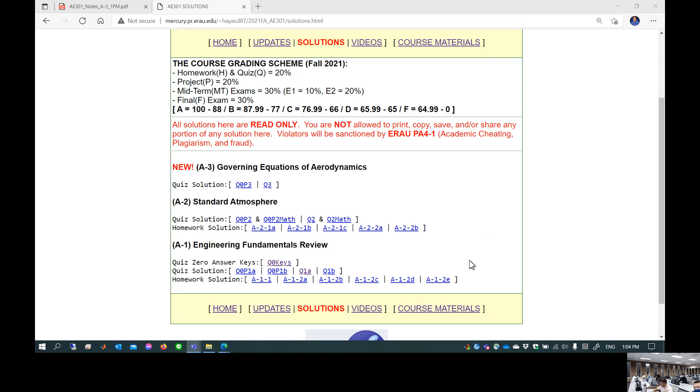Okay, so no new updates. We keep talking about the energy principle. We got stuck on Bernoulli. We need something, not Bernoulli, but something we can use - a replacement of Bernoulli, that's what we're seeking. So let's continue seeking by employing the energy principle, conservation of energy, which is essentially the thermodynamics first law.

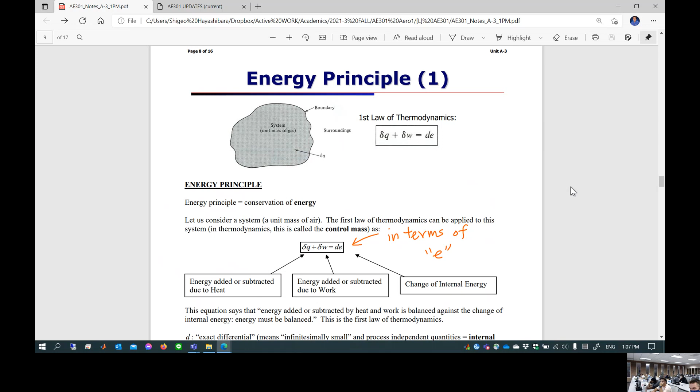So we want to include that analysis, and then hopefully we come up with an equation which can replace Bernoulli's equation in high speed. That's what we looked at. And then the starting point was, do you remember that starting point? We started from the first law of thermodynamics.

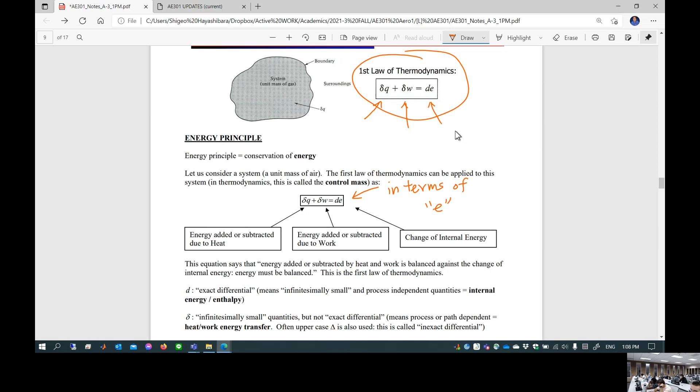Obviously, this is the first law of thermodynamics. I keep forgetting to connect this up, sorry about that. So we started from first law of thermodynamics. This basically simply says that heat transfer plus work transfer, added together, is balanced against internal energy changes. That's a very simple deal, and then we did something. We introduced moving boundary work, plugged it back into the first law of thermodynamics, and came up with first law of thermodynamics in terms of internal energy to begin with. This is equation 1.

So this equation, if you try to look at it, the key term is delta Q. Delta Q is heat energy transfer per unit mass, equal to change of internal energy plus something called PdV, pressure times the differential change of specific volume. This is a change of specific volume because of the pressure, it just keeps shrinking and expanding. So those two things added together is going to be the external application, like a heat exchange due to temperature change. This is the heat energy transfer involved.

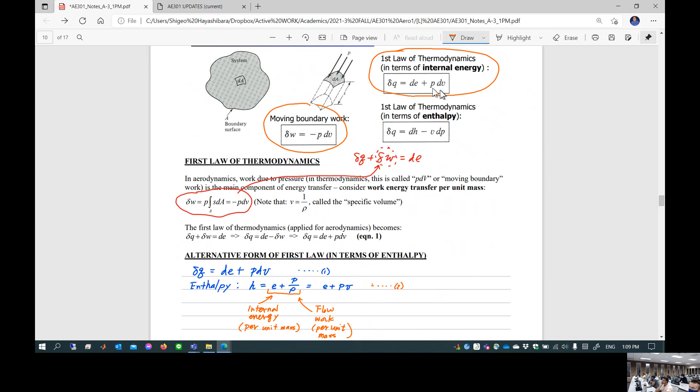Now, starting from here, we introduced a new variable, something called enthalpy. Enthalpy is a combined property, two things combined: internal energy and then P over rho. What's that? People say P over rho, pressure to density ratio, and then people call that flow work or flow energy. What the heck is that? It's very difficult to comprehend.

It's sort of like compressibility, yes, because pressure multiplied by the specific volume is called flow energy or flow work per unit mass. But it's not necessarily equal to 100% compressibility. But if you want to incorporate compressibility into your Bernoulli's equation, you cannot ignore that component.

When you try to solve quiz 3, you use this flow energy as a trade-off against kinetic energy, I think I made a comment on that. You are making a trade-off between flow energy and kinetic energy. That's why at the test section, what is the static pressure at the test section of a wind tunnel? That's minus Q. What do you mean by that? That's the trade-off between kinetic energy Q and flow energy, which becomes minus Q. So you give a kinetic energy Q so that you have wind flowing in the test section.

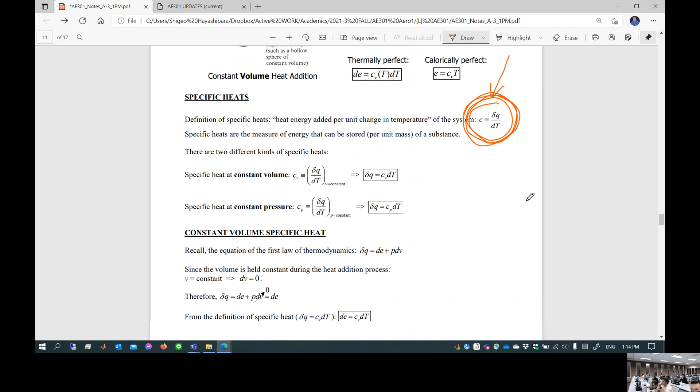So it comes with a condition to measure the specific heat. When you measure the specific heat of air, you have to employ a certain method. One method you can employ is you put your air inside of a rigid tank. Rigid tank means volume never changes. Then you stick your thermometer in it.

Then you keep monitoring the temperature until it becomes 1 degree different. You keep adding heat energy - you heat up and heat up and heat up. The amount of energy required to increase the temperature by 1 degree under the condition of a rigid tank, constant volume, is called Cv.

Specific heat under the constant volume condition. Lowercase v, because constant volume means specific volume is constant too. Specific volume is how much volume you have for 1 kilogram of air, right? So this is called Cv, constant volume specific heat. So this is one definition of specific heat.

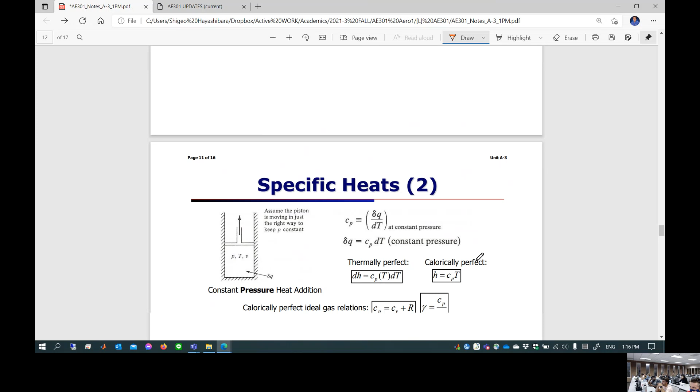You understand that? There's also another way to measure the specific heat. Let's skip to the next page. So this is another way to measure it. You can put your air into - here we go - this is a classic example of thermodynamics, the piston cylinder configuration: weightless, frictionless, no leak.

You put the air in it, but it's free to expand, obviously. So you keep adding heat energy, heat up until you see a 1 degree change of temperature, and just let it expand. If you let it expand, that means the pressure stays constant. Volume changes, but the pressure stays constant. This is called constant pressure specific heat, CP.

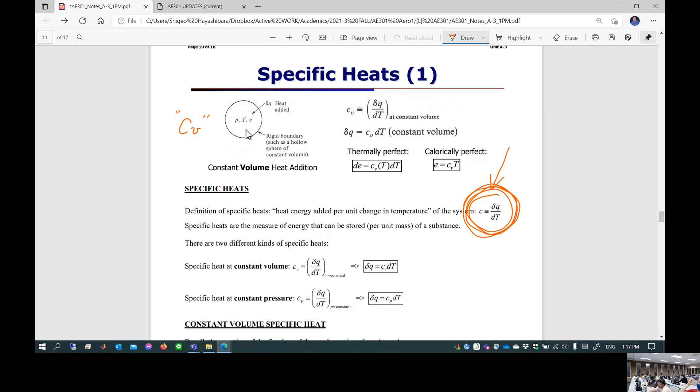So there are two definitions for specific heat, fundamentally different, because these are different ways to measure it. Do you understand those? Very, very important - this is called CP. Often, for air, we choose CP. There's a reason for it, of course. This is Cv, constant volume specific heat. This is CP, constant pressure specific heat.

So let's take a look at one by one. This is the specific heat at constant volume. Definition of Cv is, of course, delta Q - amount of heat transfer - divided by differential change of temperature under constant volume. So this equation tells you the relationship.

By knowing Cv - like I said, Cv is a material property. Air comes with a certain value of Cv, sure. So if you know, let's say, the Cv value of this classroom...

You can relate the temperature around here happening to be higher than the temperature around here because the person's sleeping and the professor's kind of mad. So this is kind of a hot zone and this is kind of a cold zone, right?

Do you think the energy is different? Of course, yes. So do you think heat exchange happens between those two? Sure - let's say because I keep yelling, putting my energy, the heat exchange, the temperature is higher here, and lower here because this person is so cool.

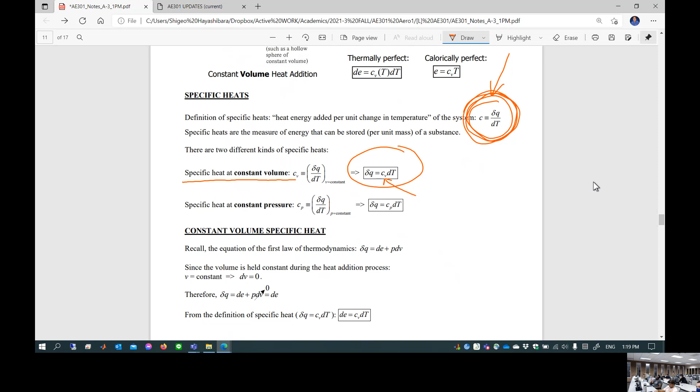Let's take a look at constant volume heat addition process. This is rigid tank. You put the air in, and then you just keep adding the heat. Delta Q is happening. Volume is constant. You just keep heating up and heating up. That's the situation - constant volume heat addition process.

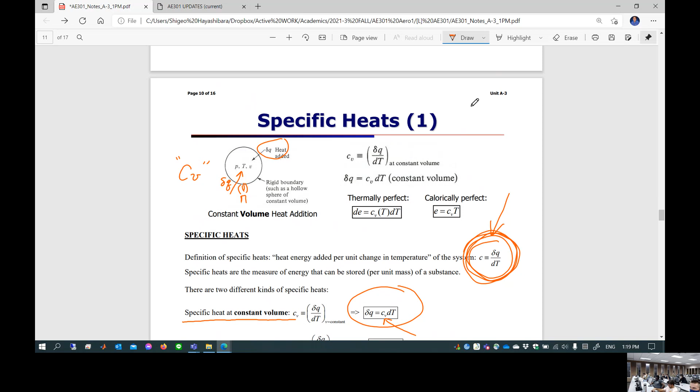Let's take a look at it. So now I'm going to pick up the equation right here - first law of thermodynamics in terms of internal energy. I'm going to pick up this equation and apply it for a constant volume heat addition process. Let's just do that.

So this is the first law of thermodynamics in terms of internal energy. This is the constant volume heat addition process. Constant volume means specific volume constant. If so, what is dV? Differential change of specific volume is, of course, 0. Oh, that means this term is 0? Yeah. This is the result for the constant volume heat addition process.

What are you talking about? This is the rigid tank. You just keep adding the heat, delta Q. And then you basically say that delta Q, the amount of heat you added, is going to be completely converted into the change of internal energy. Delta Q is equal to dE, is that correct? Simple as that, because the volume is constant. First law of thermodynamics basically says that the amount of heat you added to the constant volume heat addition process equals the change of internal energy.

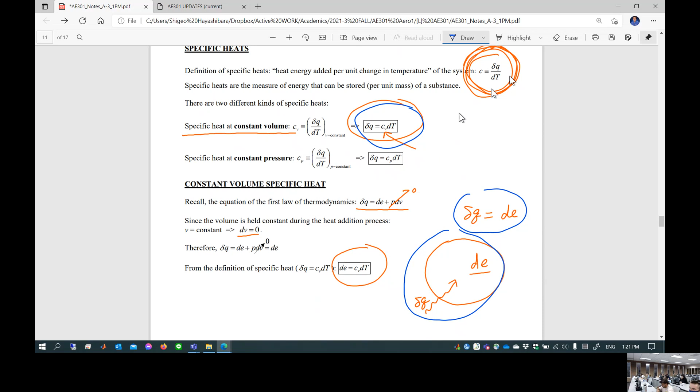Then you can combine this equation with that one. You're going to have this equation. So this is the conclusive equation here on this page: dE is equal to CV dT.

This is actually quite an important equation. This equation relates temperature change to internal energy change. If you know the specific heat under the constant volume process, since this is a material property, you can relate the temperature to the internal energy. High temperature, of course, higher internal energy. Lower temperature, of course, lower internal energy. You can say those things using this equation.

Go ahead, I just answered my own question, thank you. Okay good, did I answer? Yeah, okay good. So one more important step here. Now, this seems to be great news.

However, the problem is specific heat is not a constant. It changes. And you go like, oh my. It changes, it's not a constant. It is constant only in a range of temperature - in other words, room temperature zone. If you're talking about this classroom, yes, specific heat is 1,004.5, a constant value. However, if you're dealing with high-speed flow field where compressibility kicks in, temperature changes become severe, so specific heat will be a different value.

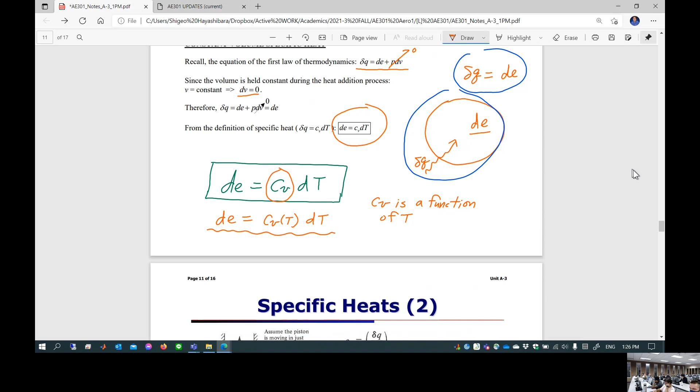Guaranteed. Next thing is Cp. We're gonna do the similar thing. This is the pressure constant heat addition process, of course. Piston cylinder, you let it expand, but let's make the pressure constant.

Okay, so we're going to do the same thing. We are going to pick up the first law of thermodynamics in terms of enthalpy. Remember, this is the equation we derived in last class. In terms of H, enthalpy is involved. By the way, what is enthalpy?

What is enthalpy? Internal energy plus flow work. E plus something, flow work. Flow work is essentially P over rho, or P multiplied by specific volume. That's right. So internal energy plus this thing combined together is enthalpy.

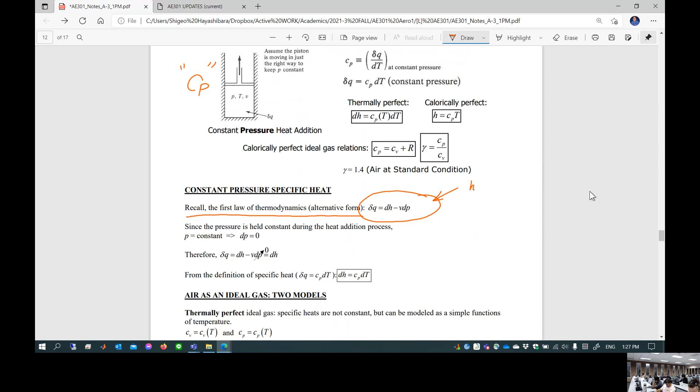Remember that? Okay, so let's go through the same process. This is constant pressure heat addition, that means P is constant. dP is 0, oh, that means this term is 0.

So the equation basically becomes: whatever heat is added to this constant pressure heat addition process is converted 100% into change of enthalpy. What is the change of enthalpy? It's two things combined. Obviously, if you add heat for this type of piston cylinder configuration, internal energy increases, temperature increases. At the same time, you create work.

Those two combined is enthalpy, right? So if you add heat for this kind of configuration, two things happen: temperature goes up, and work created goes up. Those two combined is called what? Enthalpy, that's right. Okay, that's what we are seeing.

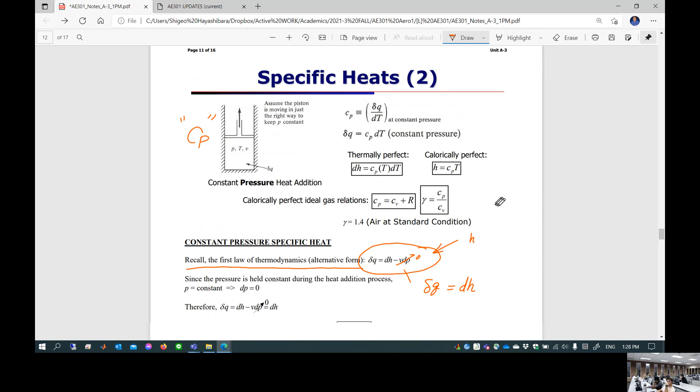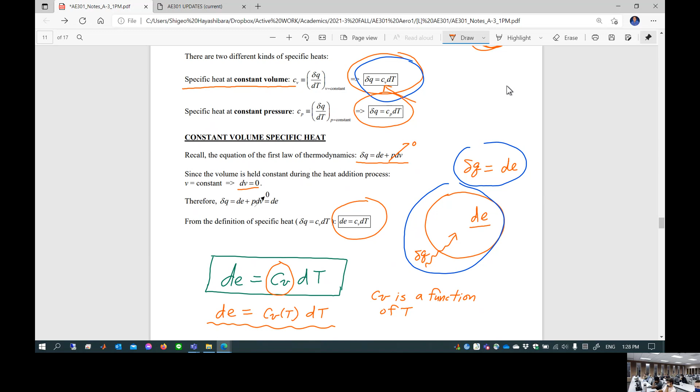Now we are going to combine this relationship together with the relationship from the previous page, and you're going to come up with a similar equation to what we have here. So let me just draw a conclusion here: similar equation, dH is equal to Cp dT. Okay, so this basically relates the temperature to enthalpy.

Question? Yeah, that symbol in front of the Q, is that supposed to mean change? For the symbol in front of Q, does that mean the change in heat or something? It's an infinitesimal change, yeah. It's a heat transfer. Heat transfer is a change, how much energy you transfer. Yeah, that's delta Q.

Okay, so once again, bad news: this Cp is not a constant. Is it a function of? It's a function of temperature. So here we go: dH is equal to Cp, as a function of temperature, dT. So you've got a similar equation, thermally perfect ideal gas.

Okay, let's just summarize here. So thermally perfect ideal gas means you can relate the temperature change to the enthalpy change if you know the value of specific heat under constant pressure. However, this is not constant, it's kind of constant under this temperature range. That's called calorically perfect ideal gas.

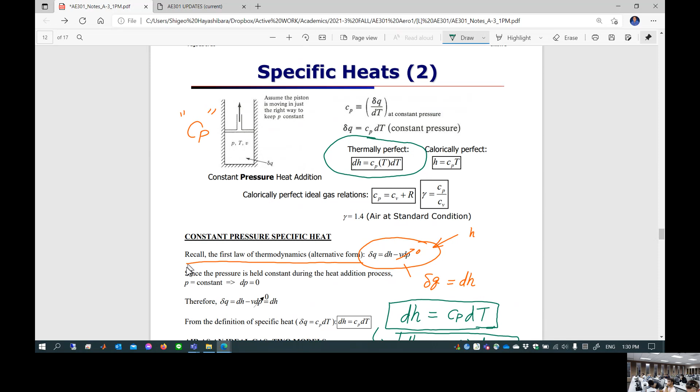Similar to the previous page: thermally perfect ideal gas means if you know the information of specific heat under constant volume, you can relate the temperature change to the internal energy change. Problem is, this is not a constant function of temperature. It's called calorically perfect ideal gas model.

So the problem is, this is kind of similar to equations you've seen in the past, a governing principle. The hydrostatic equation is an equation like this, differential form, right? Euler's equation, it's a differential form too. This is also differential form. You don't like this form because you cannot plug in a value and get a value out.

So you have to do something. What do you do? Integrate. Integrate both sides, but this is not constant, Cv's not constant. Let's assume this is constant, then you can finish up the integral: calorically perfect ideal gas. Okay, so always starting from here.

Now under this range of temperature, let's assume it's constant, just like Daniel Bernoulli assumed here: let's assume density constant, finish up the integral of Euler and get Bernoulli. That's the same thing happening here. So you're going to get calorically perfect ideal gas, assuming this is a constant value over a given range of temperature, typically called room temperature, right?

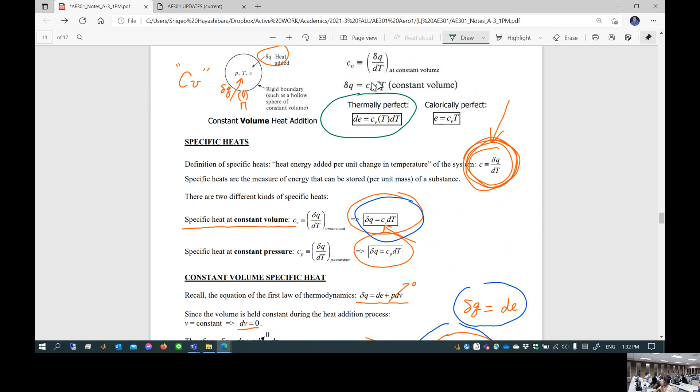No, I don't know Cv, actually Cp, because I oftentimes use only Cp. So same here. Calorically perfect ideal gas relates H and T if you know Cp, if the Cp is constant.

1004.5 joule per kilogram Kelvin, or 6006 foot-pound slug rankine. How did I get that?

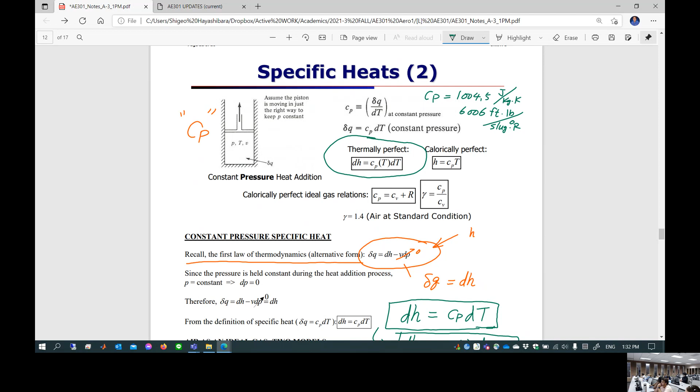Prepare to derive the equation to get the Cp value. It's your homework. It's easy. Don't worry about it. Any question here?

Go ahead. What do you mean by the range? Is it like plus minus? Yeah, let's find range out. A little bit later. Just be patient, a little bit more. You're going to find out. Don't worry about it. Okay?

And then there's a relationship between Cp and Cv. If you know one of them, you can tell the other one. This is the relationship between Cp and Cv. If you know Cv, just add the gas constant of air.

Do you know the gas constant of air? 1716 foot-pounds per slug rankine, or 287 joule per kilogram K. That's the gas constant of standard air. If you just add that to Cv, you can get Cp. We're going to derive this relationship also later. Just wait for a second.

So I see it says calorically perfect ideal gas relation, but could you use it if it wasn't a perfect relation, if it was more thermally perfect? You are going to introduce errors, of course. Obviously, the air is going to store a different amount of energy if it's a high temperature zone. So you're going to introduce error in your simulation or analysis. Yeah, that's right.

And then for the calorically perfect case, is that H equals Cp times the change in temperature? No, this is temperature itself because you integrate it. This is the temperature, let's say 25 degrees C. What is the enthalpy here? You can compute it, right? Isn't that great? Yeah, because it's calorically perfect ideal gas.

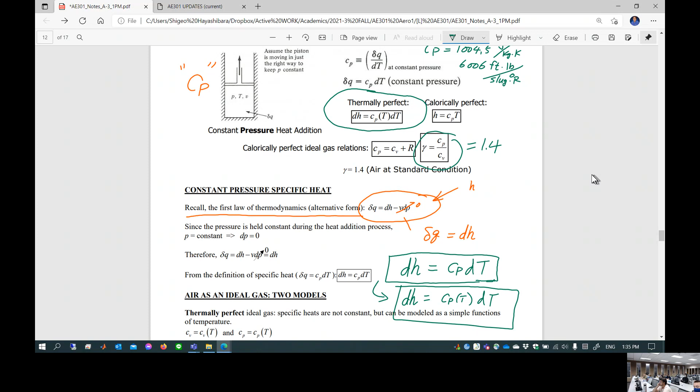We're going to later take a look at how the speed of sound equation comes up. We're going to derive that equation once again in this class. Does gamma equal 1.4 only when Cp and Cv are calorically perfect constants? That's right. If it's thermally perfect, you can't say that. Correct, but it's about 1.4. It's not quite 1.4.

So that is two different kinds of models we talked about. Thermally perfect ideal gas means that we have knowledge of a specific heat. However, you cannot treat it as a constant value throughout the flow field. This typically happens for high speed.

So subsonic, you can safely assume this is calorically perfect ideal gas. And supersonic is usually, well, it's still a perfect gas, but can I assume it's calorically perfect? No, not quite. It's probably thermally perfect. You can still use the relationship between pressure, density, and temperature, but let's not assume specific heat is constant throughout the flow field for supersonic. If you go beyond like Mach 6 or something, it's called hypersonic.

Now it's no longer ideal gas. That's what we usually treat in aerodynamics. So that's quite important. In AE301, we are going to focus on calorically perfect ideal gas mainly because we are talking about subsonic flow speed. Typically, this is the truth: specific heat ratio Cp over Cv is usually 1.4.

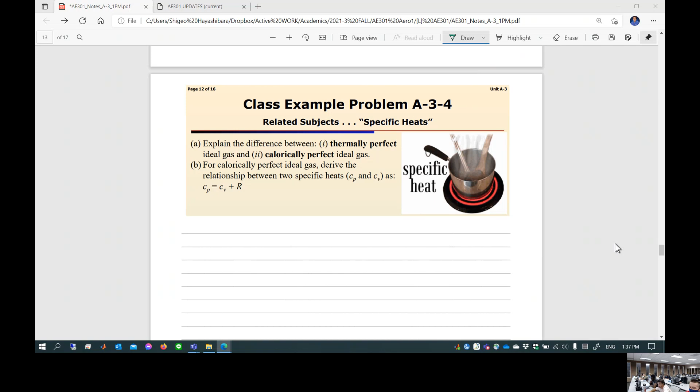So let's take a look at this example problem. If you're sleepy, pick up your calculator right now, start punching numbers rather than sleeping in class. You are wasting tons of money by sleeping in this class. You have to realize that. Do you understand? Okay, let's move on. You are sleeping because you don't want to understand. That's all right for me, but it's going to hurt you—not right now, but possibly a month later, before you graduate. Do you understand? Let's not do that.

Explain the difference between thermally perfect and calorically perfect ideal gas. If you're not sleeping, you'd go, duh, I know that. If you're sleeping, you have no clue what I'm talking about. So what's the difference? Temperature is constant? No. Who said that? Is the thermally perfect ideal gas one where temperature is constant? No. Only calorically perfect gases have a constant Cp.

Calm down. Joshua, go ahead. For calorically perfect, we assume that specific heat is constant. For thermally perfect, we assume it can be made a function of temperature. Perfect, that's right. So I'm not going to write anything here since you guys know that.

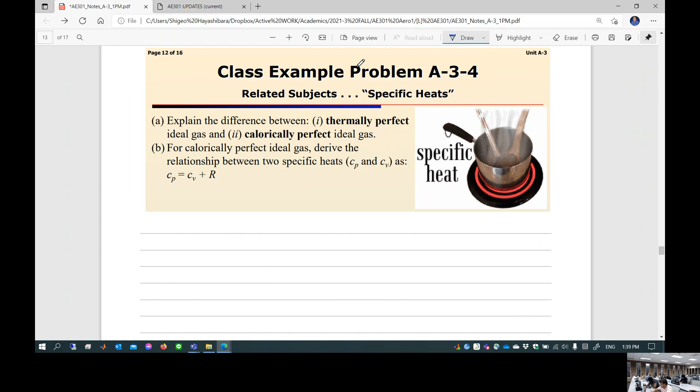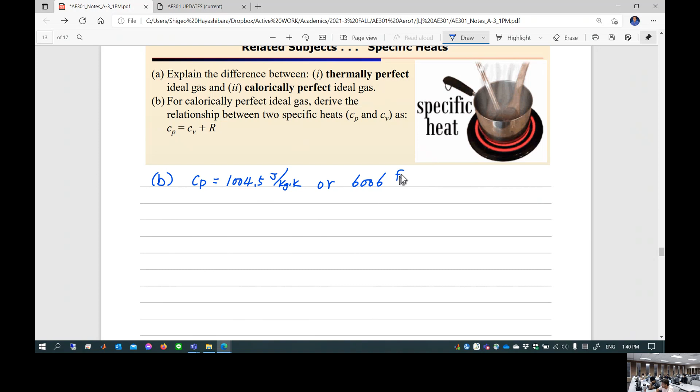So part B, let's do that. For calorically perfect ideal gas, that means you assume the specific heats are constant. Calorically perfect ideal gas means Cp is constant, which I know the value of: 1004.5 joules per kilogram-K, or 6006 foot-pound per slug-Rankine. I only know Cp—I usually don't know Cv because I can figure out the other easily.

So this is constant specific heat. This is called the calorically perfect ideal gas model. And then you can tell by taking gamma equal to 1.4, which equals Cp over Cv. Once you know Cp, you can get Cv, and if you know Cv, you can get Cp—you don't need to know both. This is also calorically perfect ideal gas.

Now let's take a look at the definition once again. Recall the definition of internal energy. If it is calorically perfect ideal gas, E equals Cv times T. We just learned that, because Cv is constant, you can relate temperature to internal energy. And H equals Cp times T—if Cp is constant, you can relate temperature to enthalpy.

Also recall, what is the definition of enthalpy? Internal energy plus flow work, P times v, or P over rho, either way. So what do you know? You know what E is, you know what H is, right? E equals Cv times T, H equals Cp times T.

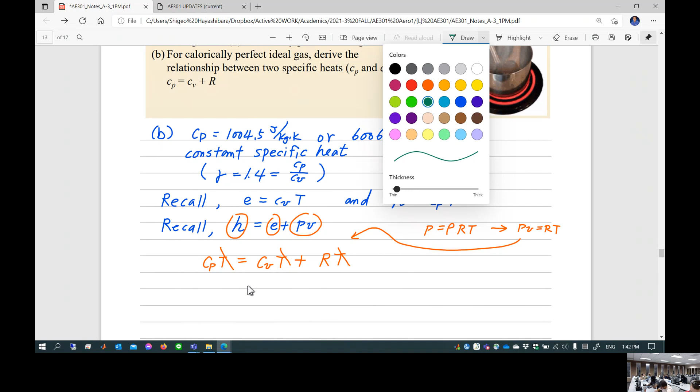So let's cancel out the temperature. Here we go—that's the relationship between Cp and Cv. Once you know one of them, you can get the other easily. This is the relationship of Cp and Cv for a calorically perfect ideal gas.

Any questions here? It's actually a very quick coverage of the core thermodynamics concept. Go ahead, question: do you get rid of density in that equation? Density is already included here—this is the inverse of density. Yeah, it's already included, density is here, inverse of density is v. Okay, that's right. Anything else? That's actually a good question, I appreciate that. Anything else?

So now you are ready to go. Let's discover the alternative to Bernoulli. So let's just recap what we did. Okay, so this is Bernoulli, right?

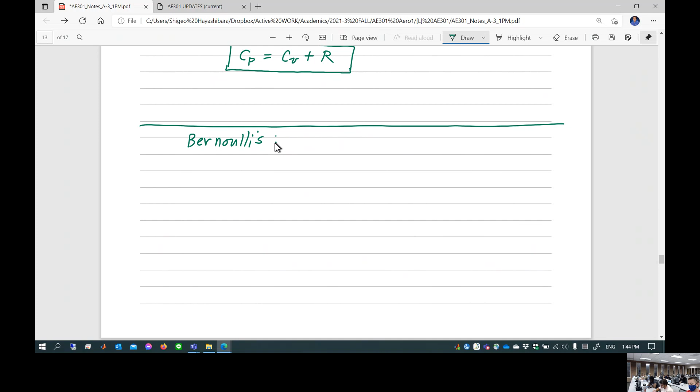Bernoulli's equation in aerodynamics form is P plus 1/2 rho V squared. Actually, in terms of fluid mechanics, you have to add one more term: hydrostatic, gamma times Z, equal to a constant. So P1 plus 1/2 rho V1 squared plus gamma Z1 equals P2 plus 1/2 rho V2 squared plus gamma Z2. This is Bernoulli's equation coming straight from fluid mechanics.

Let's do one thing: divide both sides by density, since we assume density is constant. So P1 over rho plus V1 squared over 2, plus... gamma is rho times G, and rho and G are both constant, so that term becomes G times Z1. This gives P1 over rho plus V1 squared over 2 plus G Z1 equals P2 over rho plus V2 squared over 2 plus G Z2.